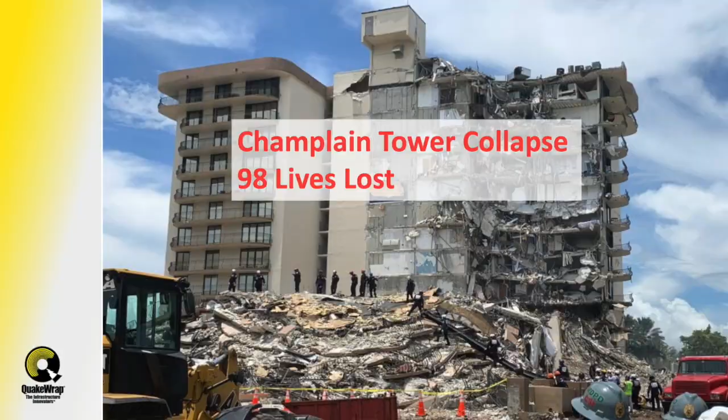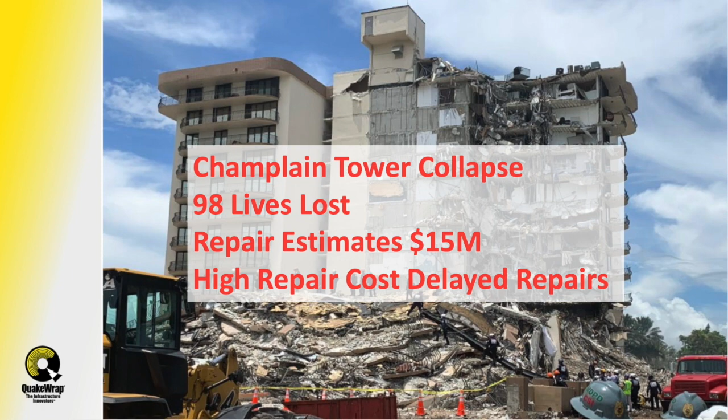As many of you know, the recent collapse of the Champlain Tower resulted in loss of 98 lives. The repair cost for that building was estimated to be around $15 million, and the lack of funds from the condo owners resulted in the delay of those repairs and the catastrophic collapse of the building.

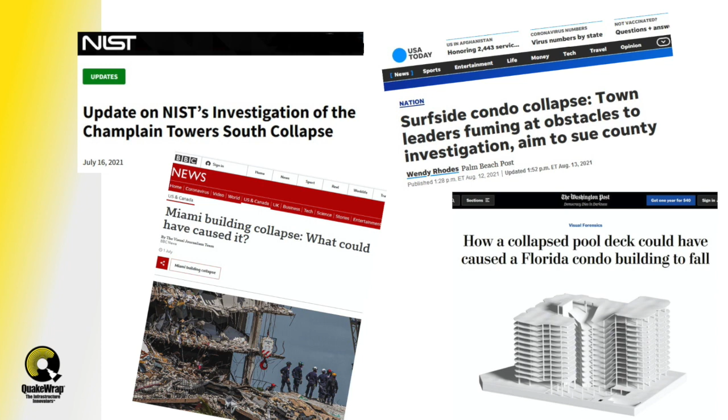In my career, I have developed economical solutions for strengthening of structures that we have used worldwide. As I listen to the experts on the news, many of them hypothesize about the potential causes of that collapse. But no one is suggesting an effective solution to prevent future collapses.

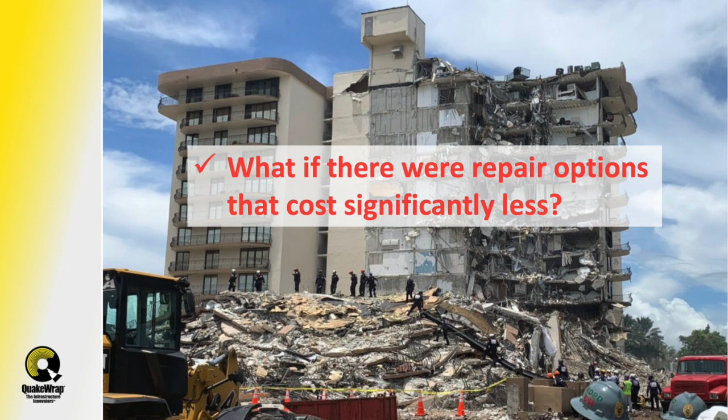I kept wondering, what if the residents of Champlain Tower were given such options that could reduce the repair costs by half or more? Would they have started the repairs and prevented this disaster from happening?

Unfortunately, we cannot do anything for that building. But there are many condo owners in Florida that are being evicted from their buildings because their buildings are deemed unsafe. Faced with high repair costs, they are helpless and desperate to return back to their homes.

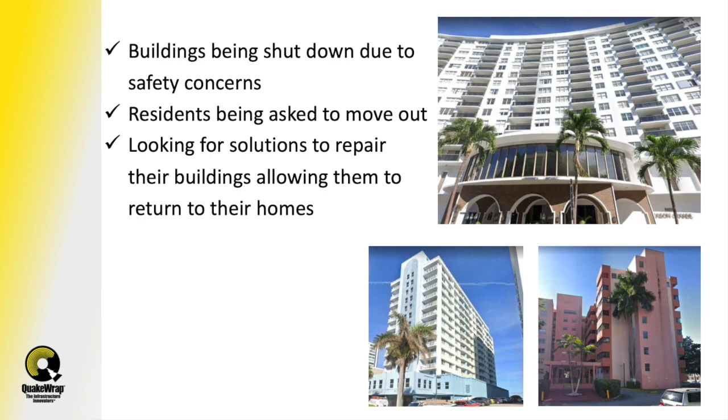This presentation is aimed at those folks to educate them on other solutions that many engineers are not familiar with, because this subject is not taught in most undergraduate programs in U.S. universities. I hope that this presentation will start a conversation between those owners and their local engineers to consider these

economical alternatives that are used by the U.S. military and many of our private clients worldwide.

I do not like to brag about my professional accomplishments, but I think if you're going to take my advice seriously, you deserve to know my background.

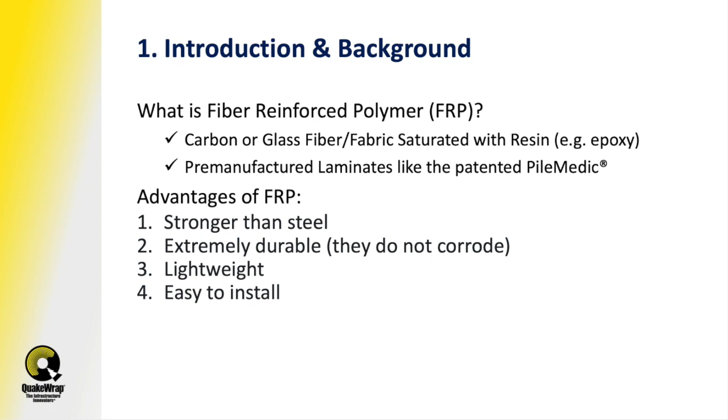A building could fail or collapse due to a variety of reasons. But typically, in most cases, failure of beams or slab in a building are localized and affect only a small area around that element. On the other hand, column failures affect the overall stability of the building and could potentially lead to the collapse of that structure.

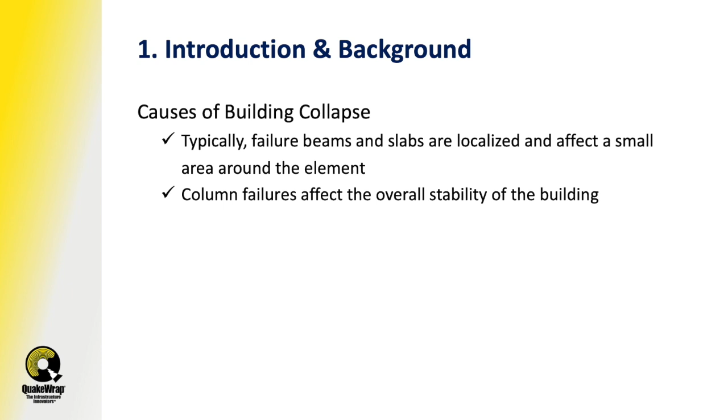Let's look at the behavior of columns and the problems associated with those. I have identified 4 shortcomings in these columns: low concrete strength, lack of sufficient ties, loss of steel due to corrosion, and continued corrosion due to presence of moisture. Let's look at each of these one by one.

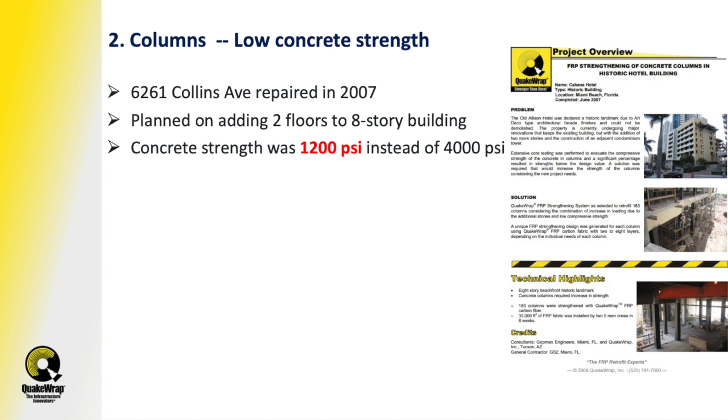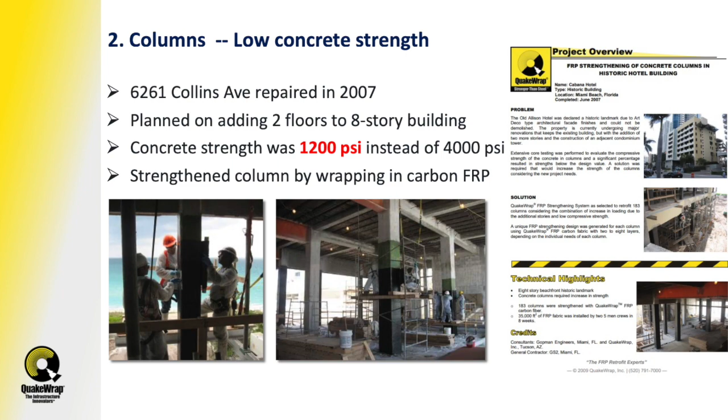When it comes to low concrete strength, I have a case to share with you. In 2007, we strengthened the building at 6261 Collins Avenue in Miami, not far from Champlain Tower. The owners of this 8-story building were planning to add 2 more floors on top. To our surprise, when we had core samples of concrete taken from the columns and tested in a laboratory, we realized that the concrete strength was about 1,200 pounds per square inch instead of the design value, which was supposed to be 4,000 pounds per square inch. We ended up strengthening the columns in those lower floors by wrapping them in many layers of carbon fabric, as I showed you before.

More recently, we were contacted by owners of a 12-story building in Miami. To my surprise, the concrete strength in the columns of this building is also only 1,100 pounds per square inch instead of 4,000 pounds per square inch. These are alarmingly low numbers. These columns have only 30% of the original design capacity. I must say that these columns look good and there is no sign of damage on them, but they're extremely weak. The only explanation I can come up with, having run across these buildings with such low concrete strength, is shoddy construction and lack of supervision. Most of these buildings built in the 60s, 70s, and perhaps 80s probably suffer from the same type of shortcoming.

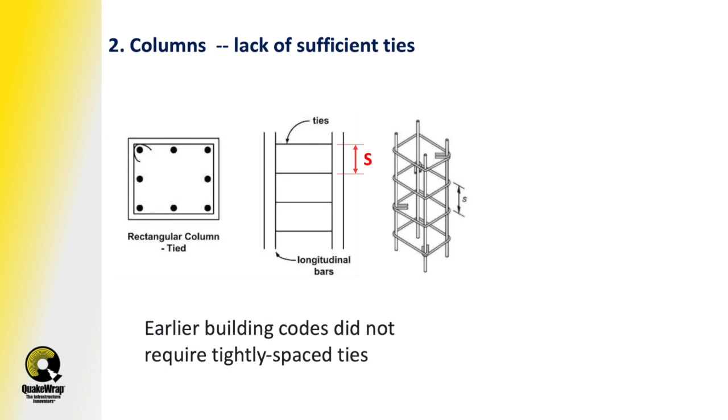The typical cross-section of a concrete column is shown in this diagram. A concrete column consists of longitudinal steel bars, shown here in solid color, and then periodically along the height of the column, these ties are placed at a spacing of S. The earlier building codes, like in the 70s and up to early 80s, didn't require a sufficient amount of these ties along the height of the column.

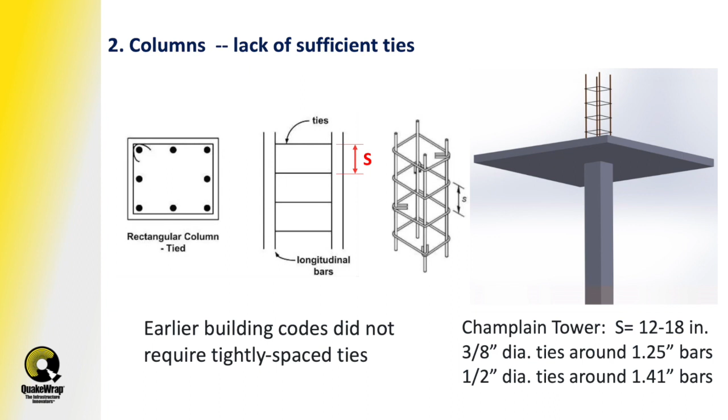For example, if we look at the Champlain Tower, we see that the spacing of those ties is roughly 12 to 18 inches along the height of the column. Also, we notice that for bars with a diameter of 1.25 inches or less, they only have a very small tie with a diameter of 3/8 of an inch going around them. And if the bars are much heftier, like 1.4 inch in diameter, then they have a 1/2 inch diameter tie going around them. These small diameter ties at such large spacing are not adequate for proper performance of these columns.

Now you may ask, who cares about the ties in the column? But let's look at what happens. Here is what happens in a concrete column with insufficient ties when it is subjected to severe loading, as might be the case in an earthquake.

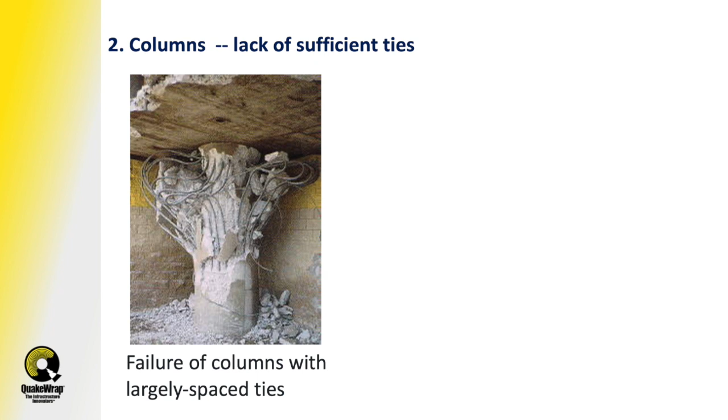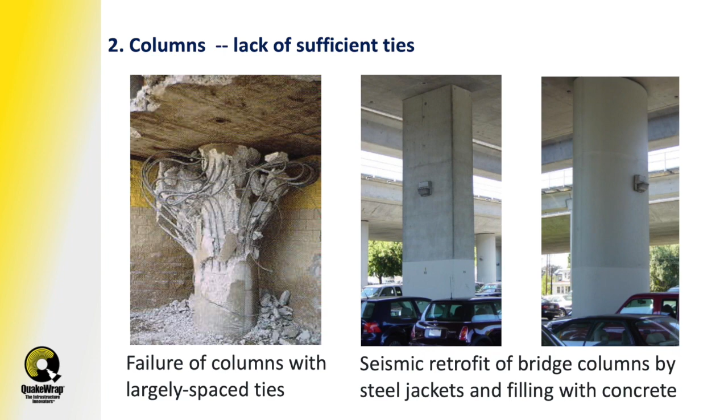In recent years, agencies like the California Department of Transportation have been fixing a lot of these columns in older bridges by encasing them in a steel jacket, and then the annular space between that steel jacket and the column is filled with grout or concrete. This type of repair definitely works well, and it prevents the crushing and buckling of the longitudinal bars in the columns. But I hope you can appreciate that bringing a steel jacket to the basement of a building or to the floors of a building and trying to lift that and put it in place is a very difficult and costly repair. The same type of repair can be done with these FRP products, as I will indicate later.

The other problem is the loss of strength due to corrosion of reinforcement. If the longitudinal steel corrodes and the cross-sectional area of those bars is reduced, that directly affects the strength of the column in axial capacity. Also, if the ties start to corrode and lose their thickness and diameter, they can no longer provide the necessary confinement around those longitudinal bars, leading to earlier failure. Both factors contribute to a loss of strength that could result in sudden failure.

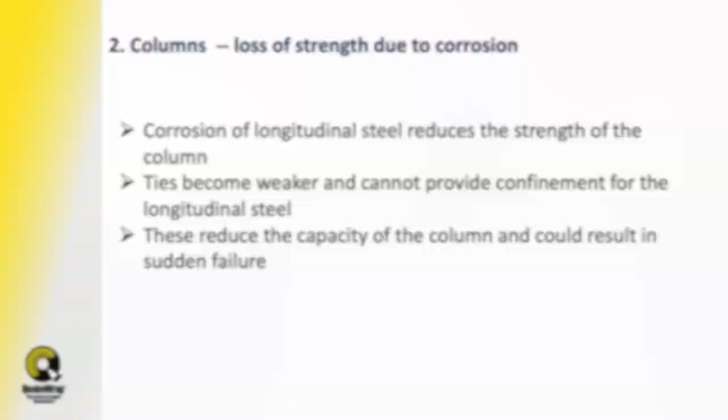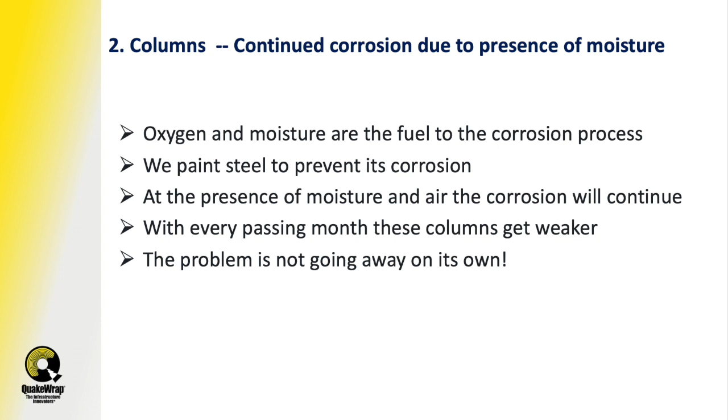The other problem is the continuation of corrosion due to the presence of moisture. Oxygen and moisture are the fuel to the corrosion process. This is why we paint steel to prevent its corrosion. In the presence of moisture and air, the corrosion process will continue. With every passing month, these columns in buildings in coastal areas are getting weaker and weaker. This problem is not going away on its own.

Let's look at the solution we are providing to fix these issues with the columns. Many of these columns are in basements with parking garage areas, so you don't want to enlarge the size of these columns significantly. If that's the case, we can cut the corners of these columns as shown here, which limits the footprint of the repair.

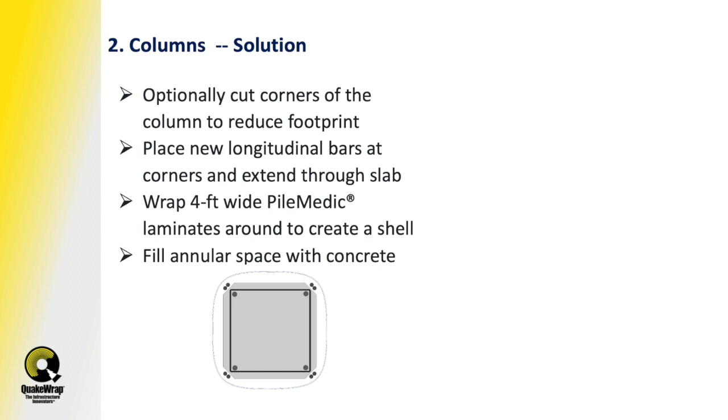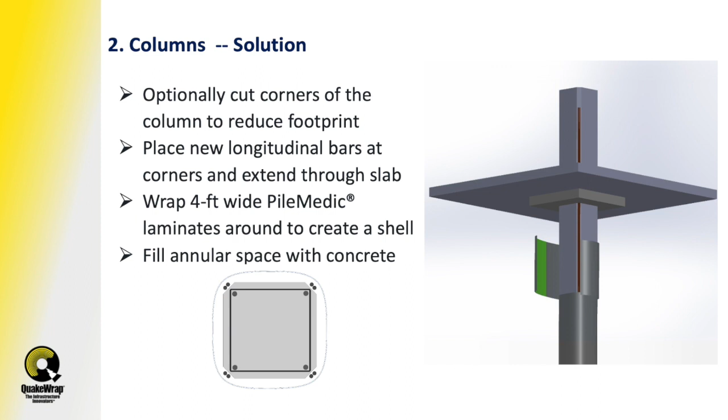Then we can provide additional longitudinal steel bars for the columns. These would be drilled through the slab at those corner locations and pass from the garage level all the way up to floors 2, 3, or 4, as many floors as needed.

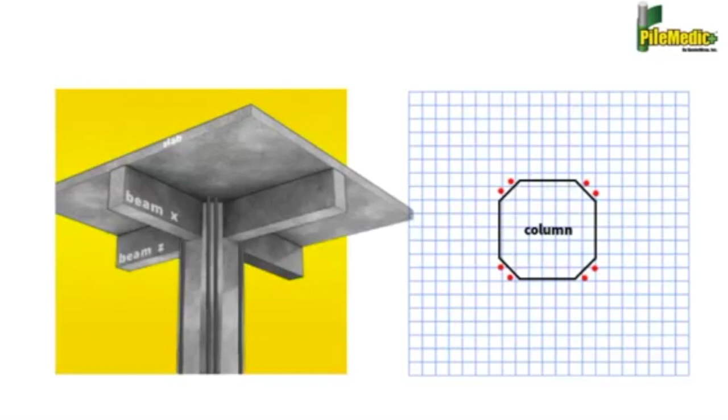Then we will have those laminates, like the PileMedic laminates I mentioned. They come in 4-foot wide bands. We take these bands and wrap them around the column to create a shell on the outside of the column. Finally, as the next step, the annular space between this shell and the column is filled with concrete.

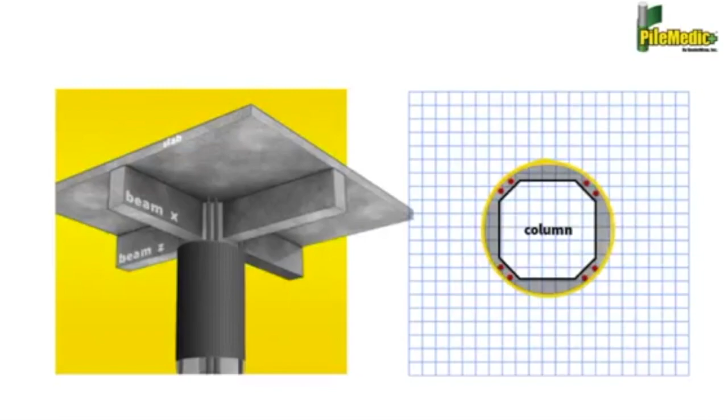Now, how does this solution address those shortcomings in the columns we looked at before? One of them was the low strength of concrete. These PileMedic jackets provide confinement pressure that increases the concrete strength significantly.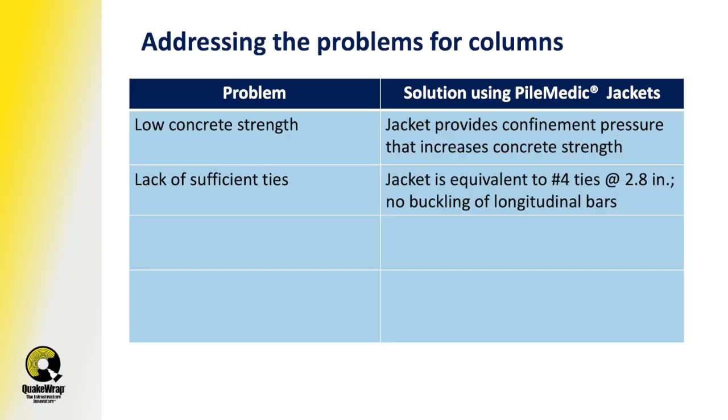The other problem was lack of sufficient ties, or the large spacing between the ties, if you recall. These jackets are equivalent to providing number 4 steel ties at a spacing of roughly 2.8 or 3 inches. So once the column is wrapped in this PileMedic jacket, the longitudinal bars in the column will never buckle.

We also mentioned the loss of steel due to corrosion. Well, we are introducing new reinforcing bars, as well as these jackets that provide strength in the hoop direction, supplementing the loss of steel and making up for more than what might have been lost in the corrosion process.

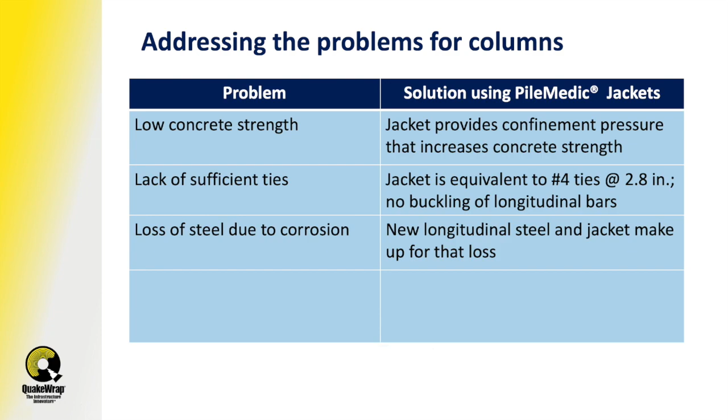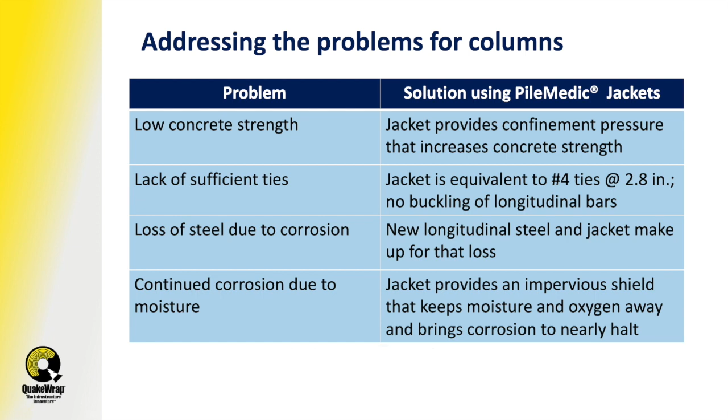I also mentioned that in the presence of moisture, corrosion will continue. Well, these PileMedic jackets provide an impervious shield that keeps moisture and oxygen away from the column, bringing the corrosion inside the column to near halt. Finally, as an added bonus, these PileMedic jackets themselves will never corrode, making this a durable and long-lasting repair.

Another issue related to the potential failure of these buildings is punching shear. In many older constructions with a flat plate slab, overstressing of the slab could lead to what is known as a punching shear failure. Basically, in the area in the vicinity of the column, the slab would punch through.

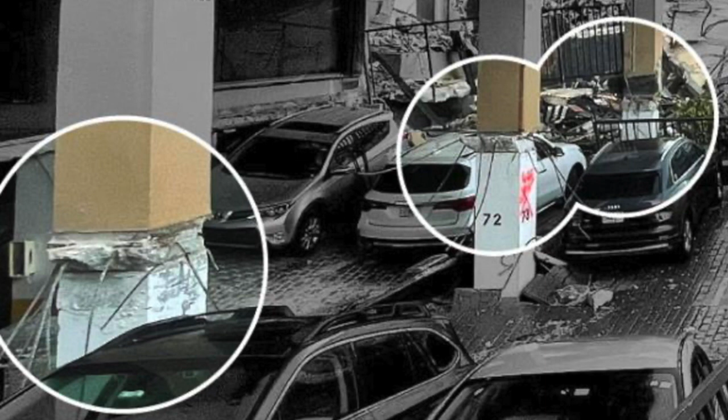As you can see on this diagram on the right, this was taken from Champlain Towers. In the areas shown in the circle, there used to be a slab, and cars were sitting at that slab level. You can see that the punching shear failure resulted in that slab and the group of cars dropping about 4 or 5 feet, landing on the floors or cars below.

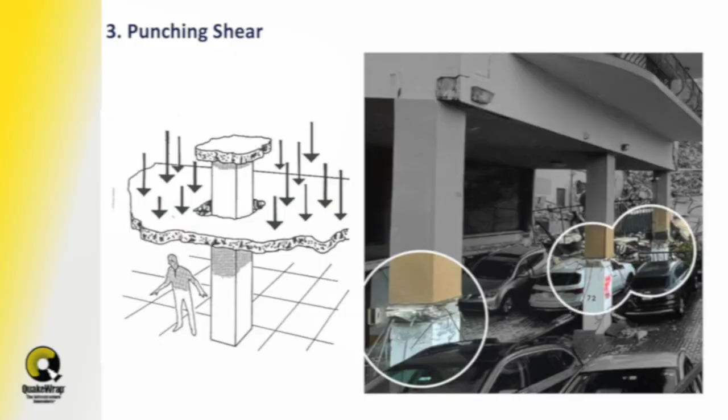In modern construction, to make sure punching shear does not occur, we use what is called a column capital or drop panel. This is basically a thickening of the slab in the vicinity of the column.

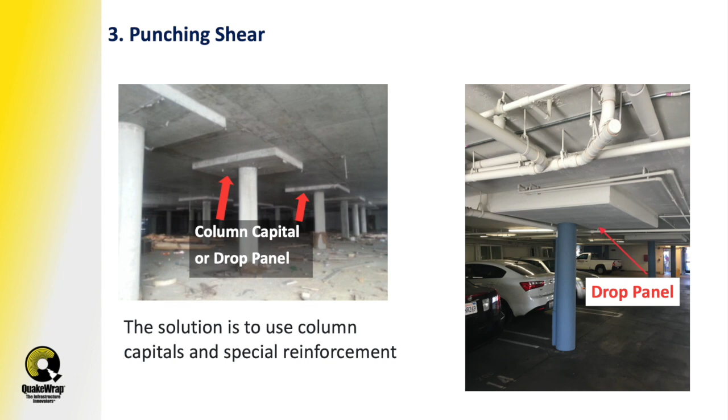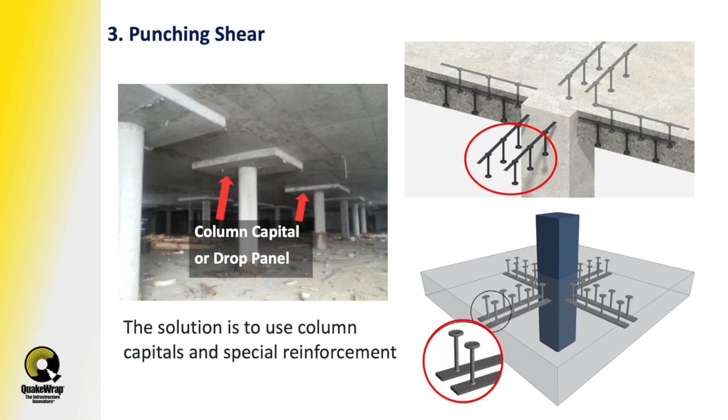As shown on the right here, in some cases additional reinforcing steel will be placed in the column or in the slab in the vicinity of that column to avoid punching shear failure. Notice that the reinforcement bars shown in these diagrams are vertical legs—keep that in mind, because this is what we have to provide to strengthen the slab against punching shear.

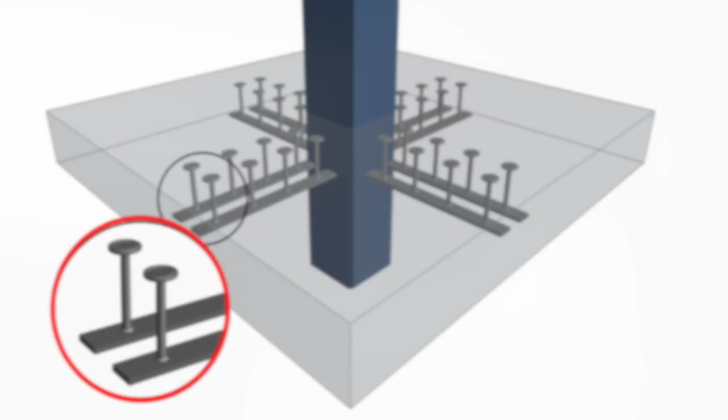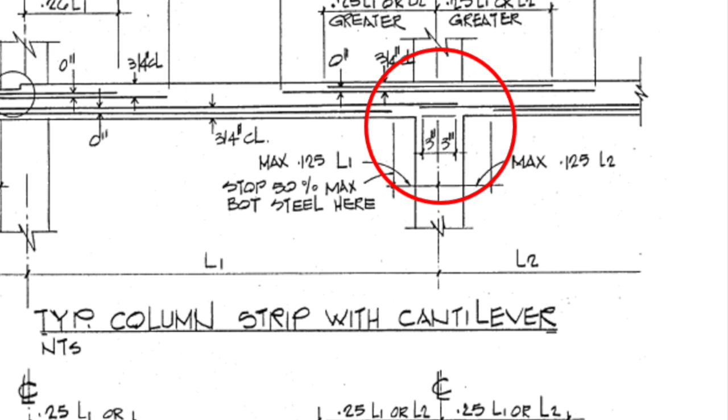Another related issue is that in a lot of these older buildings, the longitudinal bars in the bottom of the slab over the column do not overlap with sufficient length. If we zoom into these Champlain Tower drawings, for example, you see that there was only a 6-inch overlap over those columns. In such buildings, if the column fails, the slab cannot support its own weight without the presence of that column, and you get a complete collapse or failure of the slab.

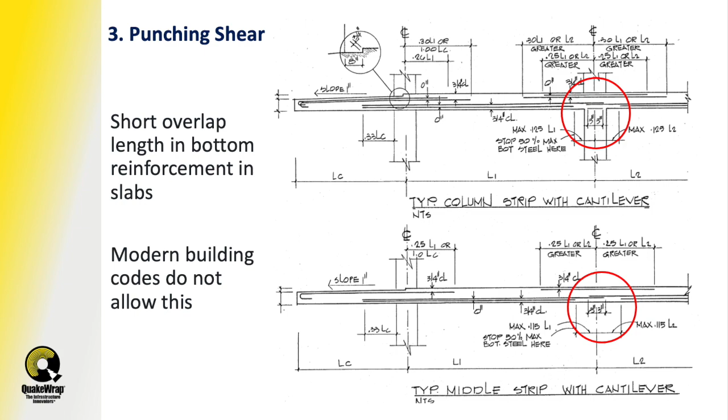This is what is often referred to as a progressive collapse. Modern building codes do not allow this, and they make sure engineers provide continuous reinforcement in the bottom of the slab.

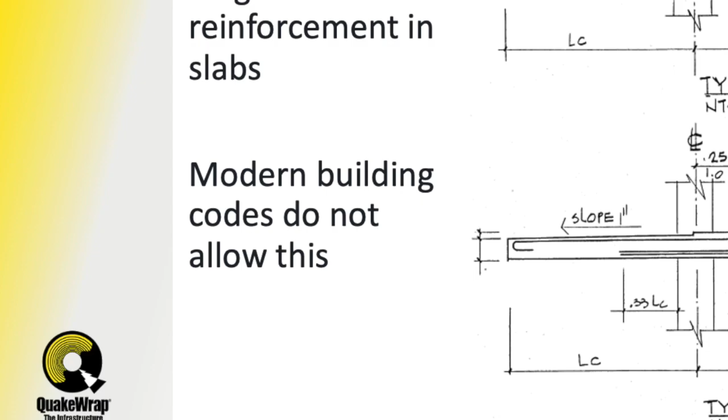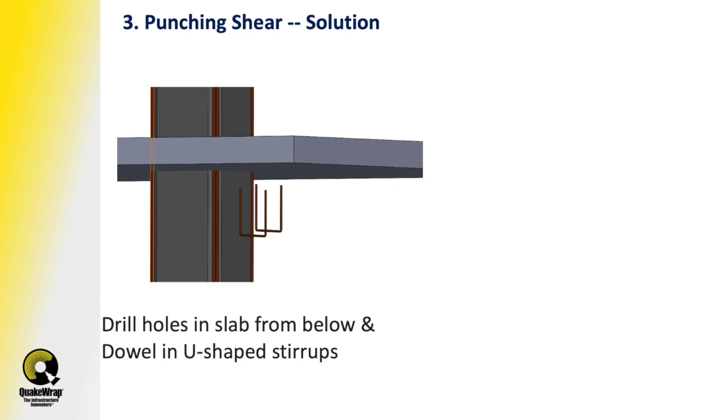Now, what does the solution for this type of punching shear look like? We can start by drilling several holes in the slab from below. These holes do not penetrate through the slab, so if you're living on the floor above, you will not notice these holes punching through your carpet. Then U-shaped stirrups are epoxy bonded into those drilled holes and anchored in place.

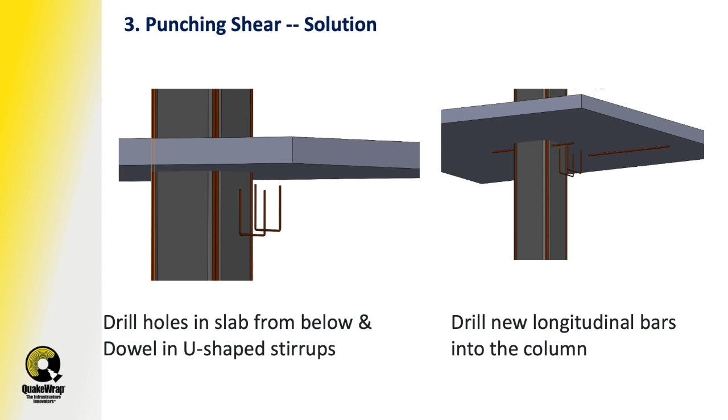Remember in the previous slide I showed you how the reinforcement for the drop panels had those vertical bars—this is the same type of reinforcement we're providing here. We can also provide horizontal reinforcement as shown here. These can be drilled through the column and extend a few feet out on either side of it, provided in both the X and Y, or in two directions.

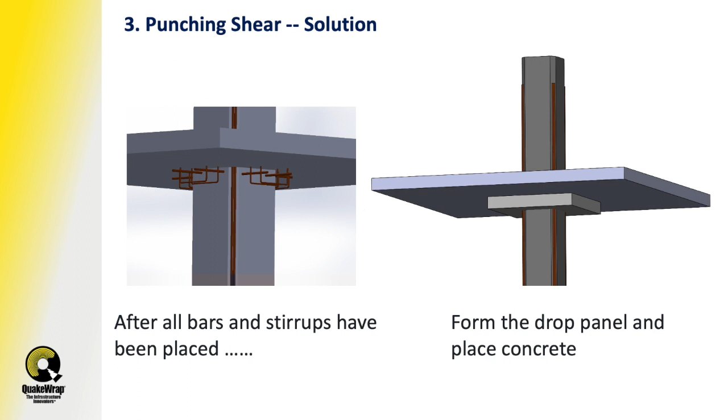So here is a column with the U-shaped stirrups as well as the longitudinal bars placed on all four sides around that column. At this stage, we can put a form around that and pour concrete, creating a new drop panel right around that vicinity. This way we can strengthen that area of the slab and prevent punching shear failure.

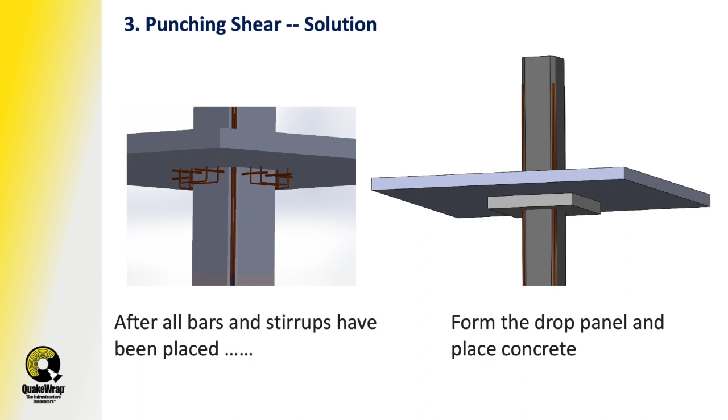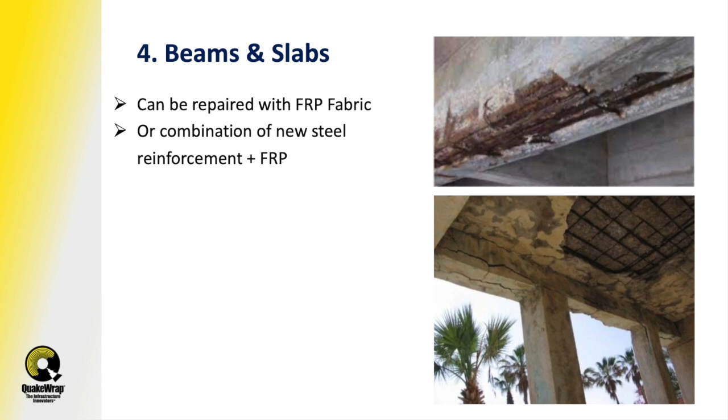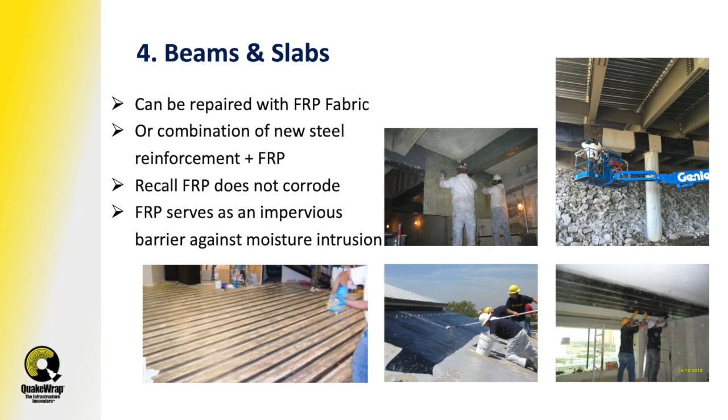The other type of failure is in beams and slabs. The easiest way to repair these is using the flexible carbon or glass fabrics I showed you before, and in some cases it may be required to add steel in combination with these FRP materials. The advantage of FRP is that these materials do not corrode, and furthermore they create an impervious barrier against moisture intrusion into the beam and slab, prolonging the life of the structure.

The last thing I want to touch on is cost savings and how these things have been tested and used in the field before. I want to be clear that, with my academic background, I am not proposing these solutions as an academic exercise.

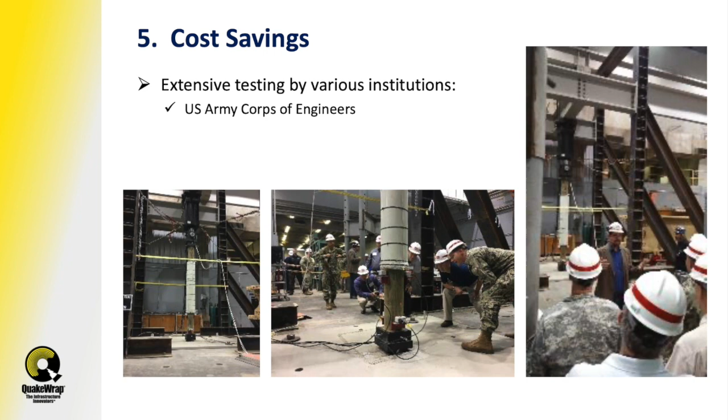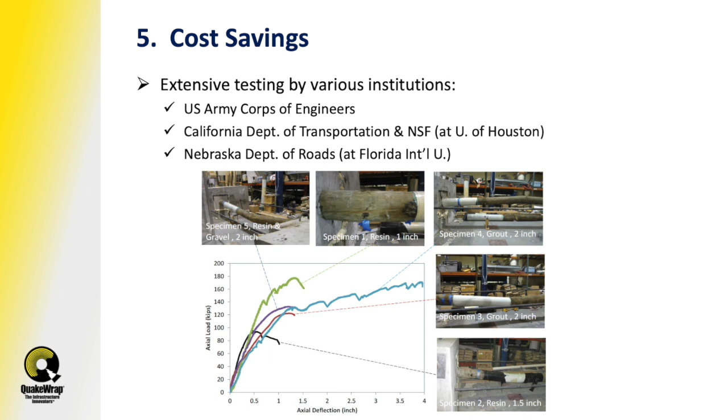These materials and techniques I've developed have been tested extensively by the U.S. Army Corps of Engineers, agencies such as the California Department of Transportation, and the National Science Foundation. These tests were conducted at the University of Houston. Even in Florida, at Florida International University, these systems were tested for the Nebraska Department of Roads.

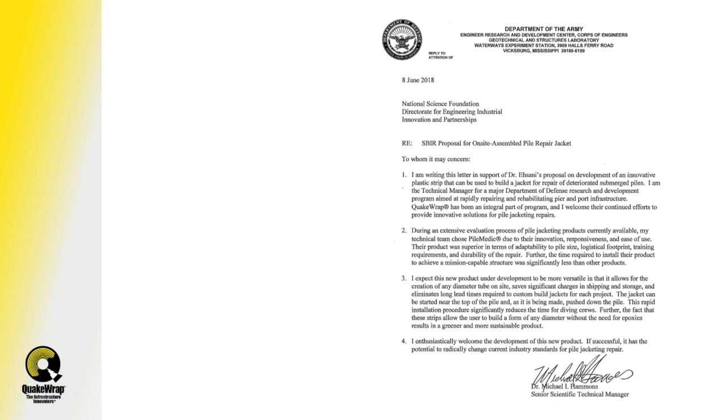This letter I show here is written by Dr. Michael Hammons, Senior Scientific Technical Manager for the U.S. Army Corps of Engineers, and I want you to see just one of the paragraphs of what he says. He says: 'During an extensive evaluation process, my technical team chose PileMedic due to their innovation, responsiveness, and ease of use. Their product was superior in terms of adaptability to pile size, logistical footprint, training requirements, and durability of the repair.' Finally, he adds that the time required to install their product to achieve a mission-capable structure was significantly less than other products.

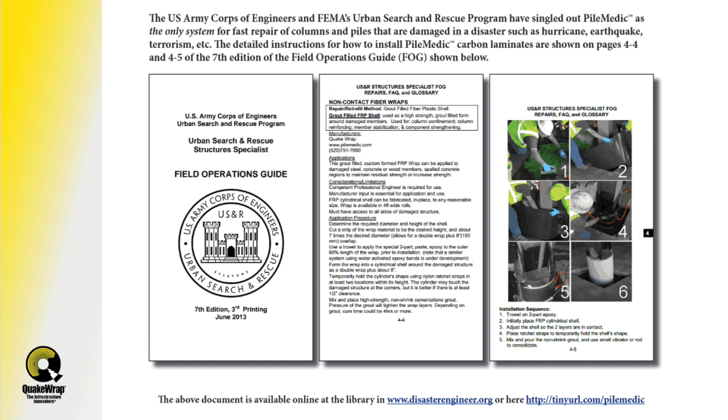This is exactly what I have been trying to convey to you, that these repairs are very fast and efficient. In fact, FEMA and the U.S. Army Corps of Engineers have a field operations guide, a pocket-sized manual that they provide to engineers who visit sites after a disaster. In that manual, there is a section about how to strengthen or shore up a column that is failing, and the only product listed is PileMedic. They show, even with pictures, how you can wrap this around the columns to make sure it is shored up and doesn't fail.

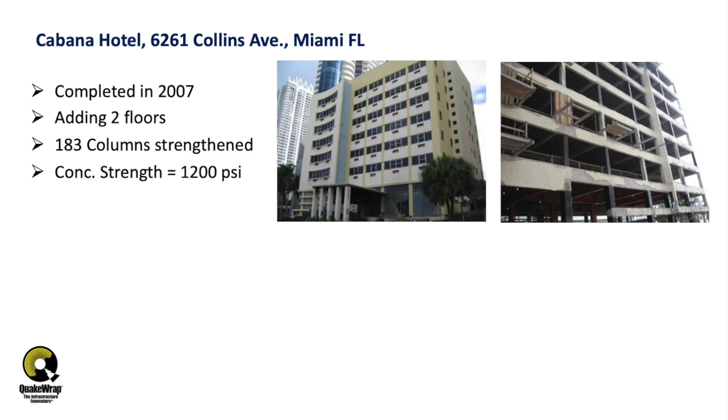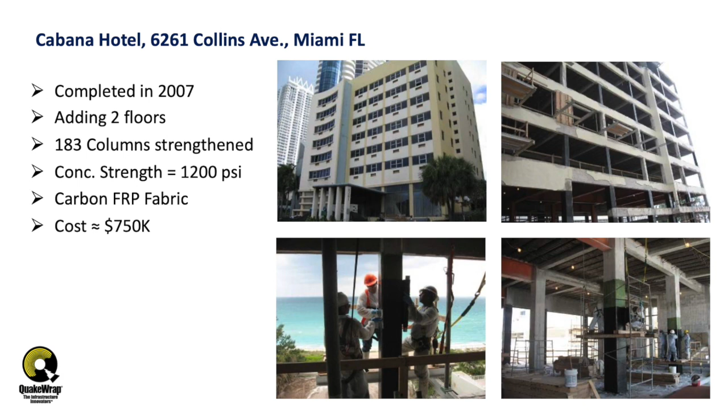Before I end my presentation, I have a few cases to share with you. One building I referred to before was the Cabana Hotel. In 2007, they wanted to add 2 more floors to that building, and there were 183 columns in the lower floors that we had to strengthen. The concrete strength turned out to be only 1200 psi, so we used many layers of carbon fabric wrapped around the columns to shore up this building and bring the strength to the desired level. The cost of this repair was approximately $750,000. If this building looks familiar, it's because today it is a Hilton hotel that occupies that property.

Another project is the Heritage Hotel in Christchurch, New Zealand. In February 2011, there was a magnitude 6.3 earthquake, and this 13-story concrete tower suffered significant damage. Engineers estimated the repair cost at $70 million, which would have required significant enlargement of columns to the point that the building was really not going to be useful for occupation anymore. In contrast, the solution we proposed using FRP technology was $19 million plus another $3 million for some incidental charges, so the total was only about $22 million.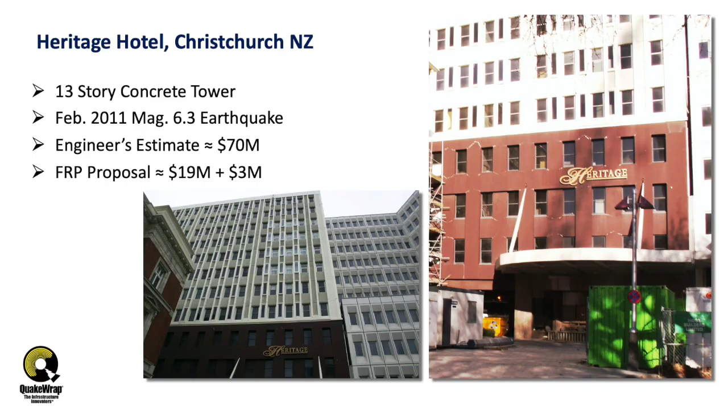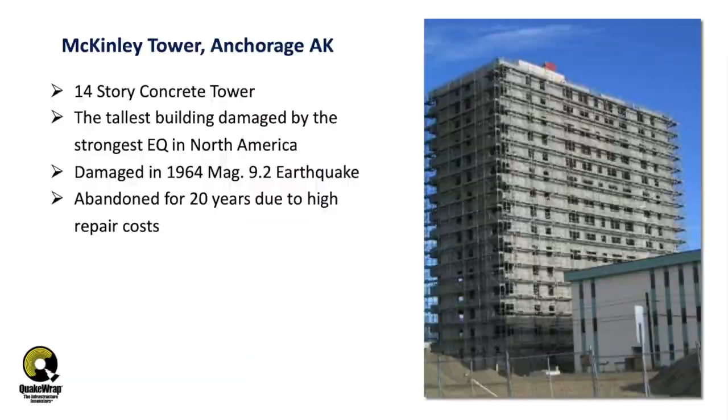The final building I want to share is the McKinley Tower in Anchorage, Alaska, a 14-story concrete tower. It is the tallest building damaged by the strongest earthquake in North America. Back on Good Friday in 1964, there was a 9.2 magnitude earthquake that hit the Anchorage area, and this building was damaged. Luckily, after all the damage, it stood straight, so they did some cosmetic fixes and moved into that building. But then, some 15 years later, the city of Anchorage withdrew the occupancy permit and demanded that the building owners fix this building.

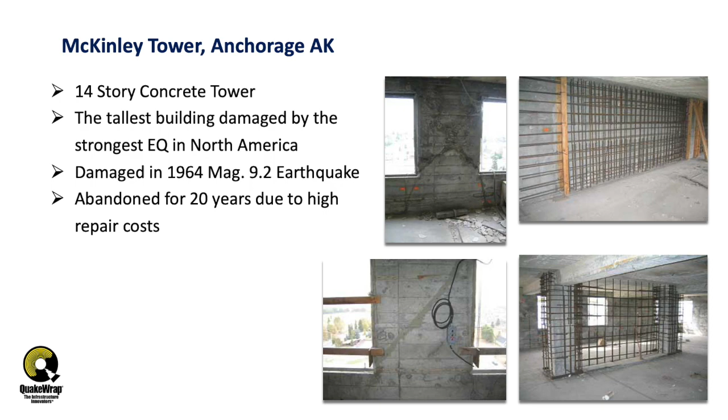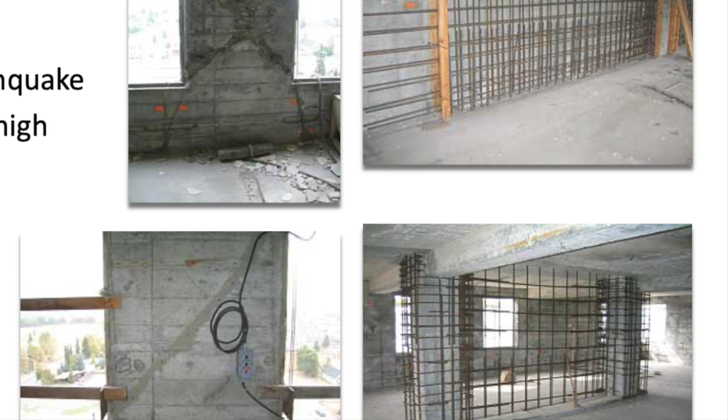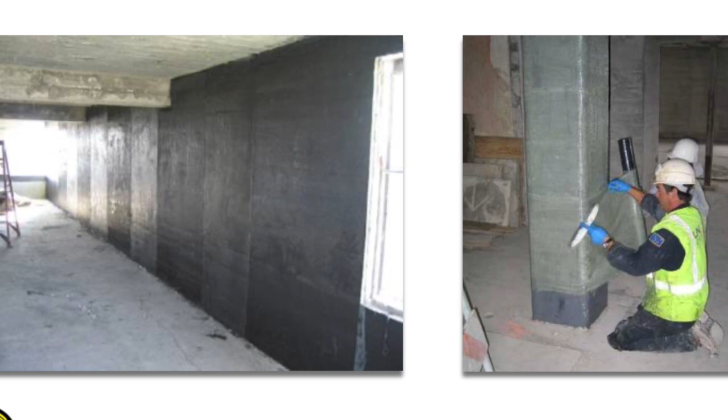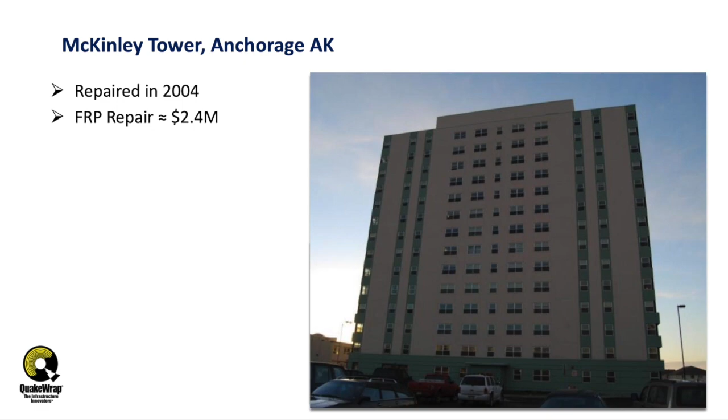The conventional repairs they tried were attempted on the first 2-3 floors of the building, then abandoned because of the high cost of repair. So this building sat vacant in Anchorage for 20 years until we finally provided a fix for it. In 2004, we did work strengthening the shear walls, as well as strengthening the columns and the floors in this building. The FRP repair total was about $2.4 million. In fact, this repair was such a major event for the citizens of Anchorage that during our repair that summer, we were covered on their local evening news as finally this building was getting fixed after 20 years of sitting as an eyesore in the middle of Anchorage.

Subsequent to that repair, the building has been added to the National Register of Historic Places, and we also received in 2006 an International Concrete Repair Institute Award of Excellence for this building.